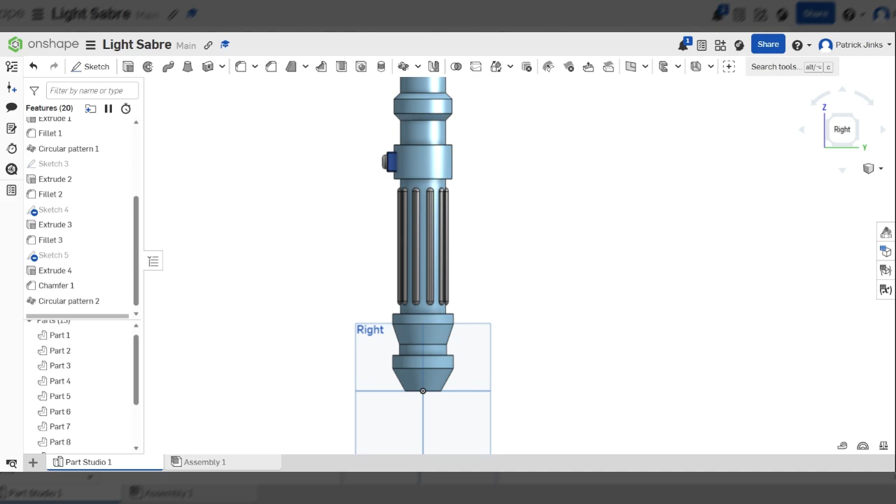Today we're going to be adding some, probably the final details onto our lightsaber. And then once we've finished this lightsaber, I'm going to go through another one just so you can see a range of different designs and features we can add, and how we might go about doing that.

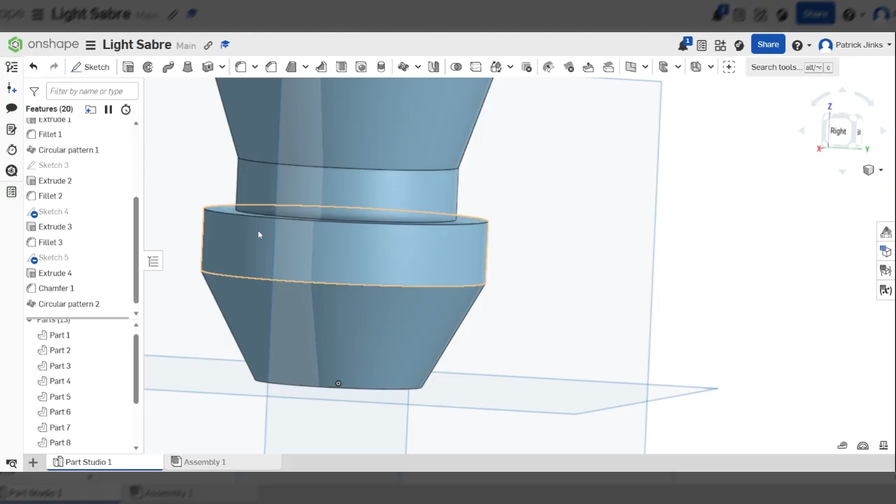The first thing I'm going to do is add a couple of features to the bottom here, to this plain cylindrical section. And the way I'm going to do that is using the circular pattern tool around here. I'm going to do something slightly different for this.

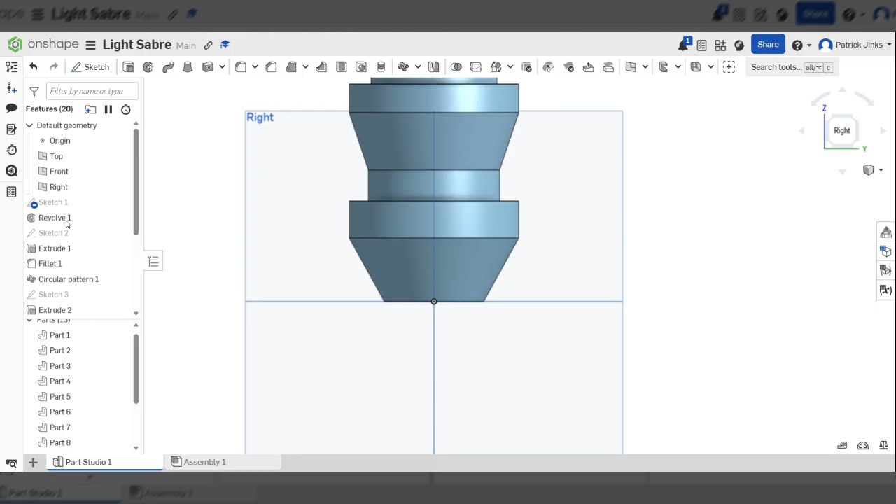The first thing I want to do is make a plane that is exactly, or near enough, halfway through this section here. Now, I'm not going to do this, but if you go back into your very original sketch by double clicking it, we only put 2 dimensions on, and that scaled up the whole thing for us, and it worked quite nicely.

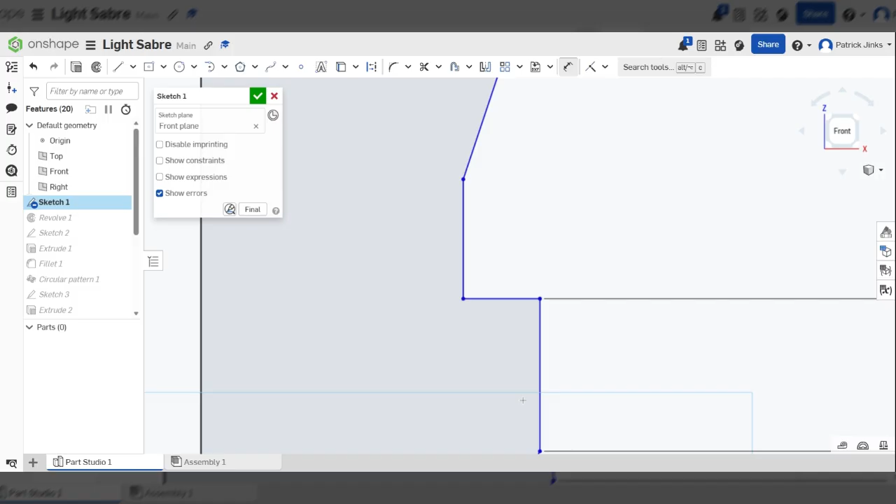What I might want to do is go into some of these dimensions I want to change, I want to specify, and just make sure they're a nice round number. So I might change that to 15, and it shouldn't do anything — it should just scooch that up a bit so that we've got a nice round number there, so I know where to position my plane.

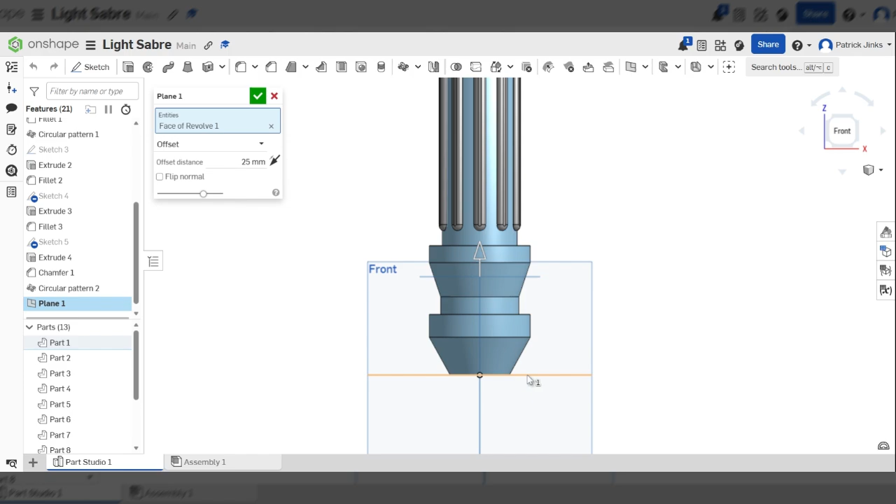So what I'm going to do is click on this flat surface here, or as near a flat surface as you can get, and once I've done that, click the plane button. That's going to put a new plane in for me to sketch on so that I can draw midway through the shape without starting at the top, the bottom, or an existing flat surface.

What I'm going to do is drag that to near enough halfway through my flat. I know that this was 15, so I want to change that to 7.5, and that's going to position this plane exactly halfway down this section that I'm working on.

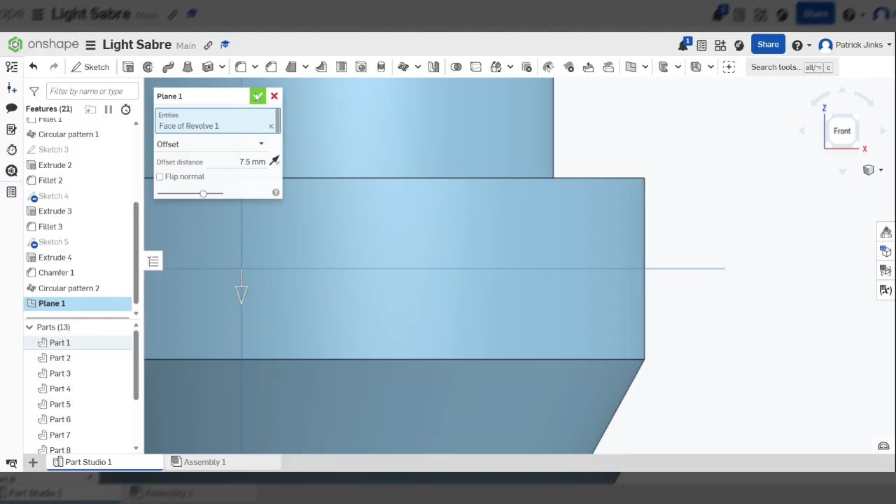What I'm going to do now is look from the bottom up, because I want to be looking up. I want to click on that plane I've just made, look at the base, press N, and that should snap me so I'm looking straight up at the lightsaber.

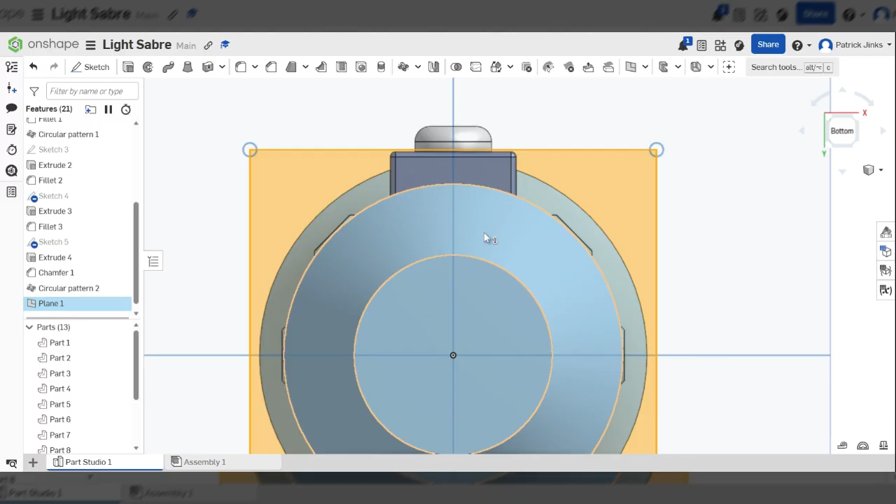I'm going to put a few triangles in here, and the easiest way to do that, I reckon, is — I can start down here, go up, it doesn't really matter how far I go up, come down, just as long as I'm in this blue section, just as long as I'm going beyond this border. That should be fine.

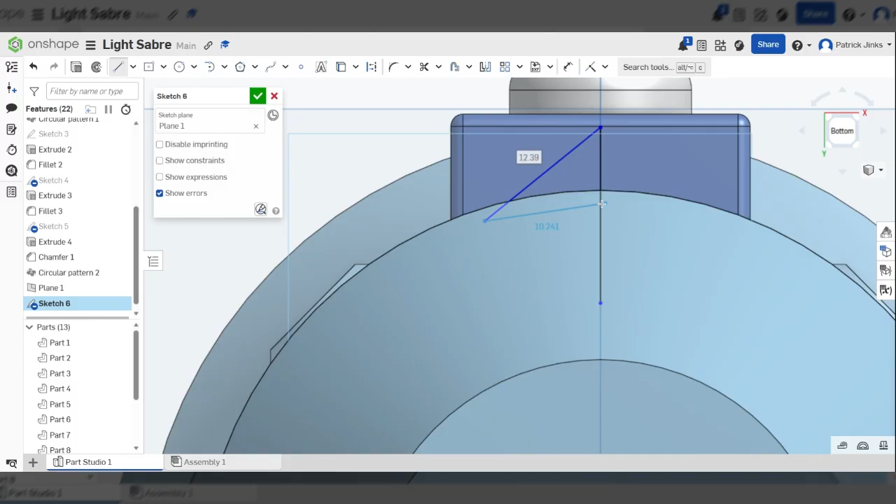Because all this part's going to be hidden — it's just going to be this bit that's sitting proud. I'm just going to trim that, and I'm going to mirror that. So click on the mirror tool, click on the mirror line, the thing I want to mirror it around, then select everything, and it pings it across.

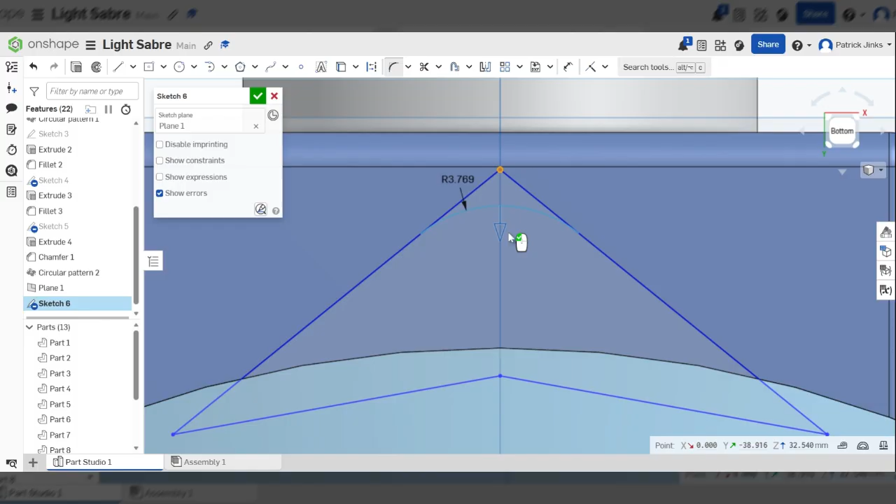I'll trim out that center line, and all I'm going to do now is put a sketch fillet on this part. I don't want it too sharp, I want it quite rounded, so I think that's going to be all right. If we rotate round and look at it, I've now got the shape that's sitting proud.

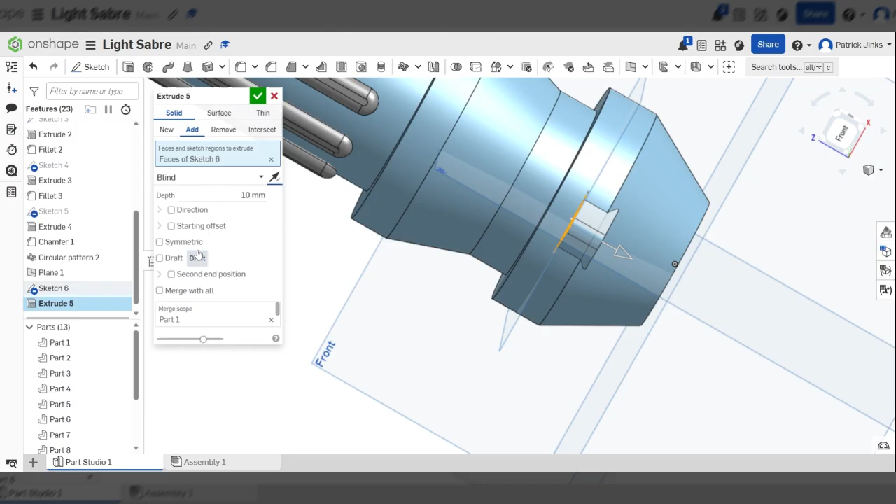I can then extrude it, and I'm going to extrude it symmetrically by 10. I'm going to see what that looks like, making sure you're clicking symmetry or symmetric. What that's going to do is put half above and half below that line.

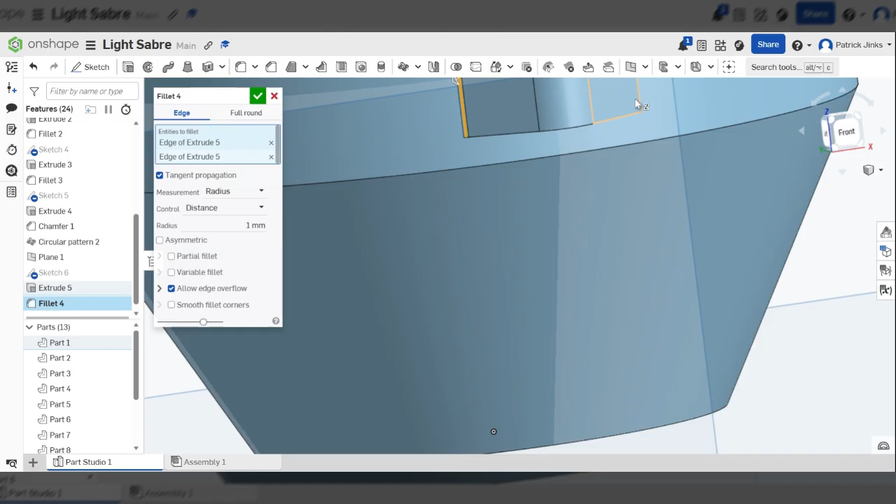I'm going to click the tick, and then I'm just going to put some fillets on the edge. You won't be able to see these too big, most likely — I'm going to make them 1 mil. That should round off those sharp edges nicely. Maybe I'll get away with 2 mil — let's have a look. No, 1.5 perhaps. There we go.

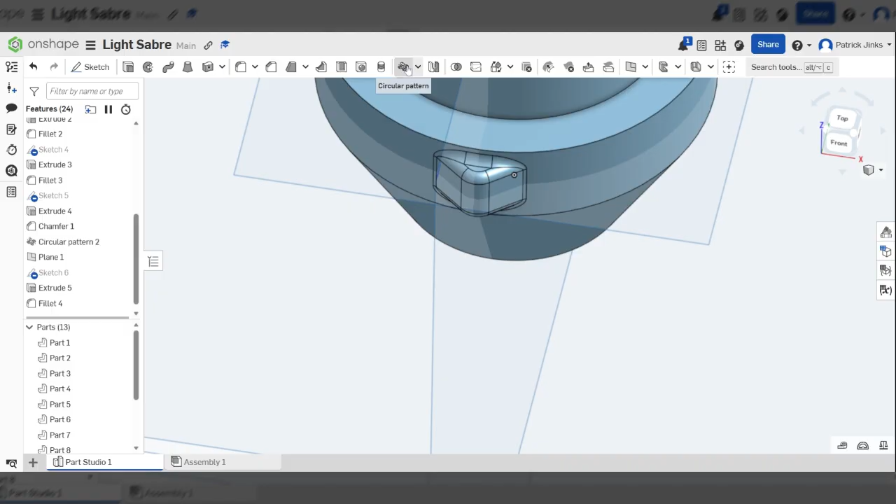So I've got this feature sticking out, and what I'm going to do now, since I've got this feature on the new plane, is circular pattern this. So I go to circular pattern, features to pattern, because I'm not adding a new part — it's going to be a new feature on the existing part — and that's going to be the fillet and the extrude.

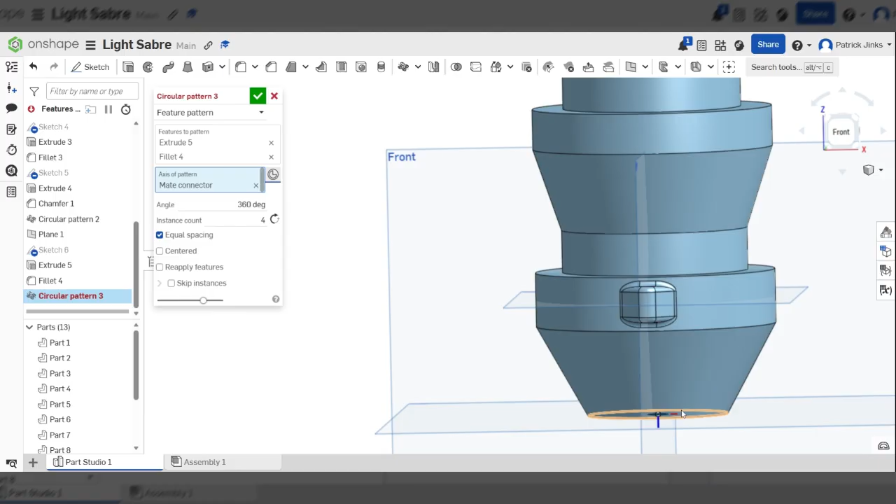The axis of the pattern — I'm going to click on my little Pac-Man symbol there, and set the origin, making sure it's following one of the circles I've got going round, as long as it follows the same center line. I've got 4 there; let's try what 6 looks like this time — I think we did 8 before. 6 looks fine, 6 looks all right. So now I've got that extra detailing on the inside.

On the outside of this bottom section, to just make it a bit more interesting, what I can do is in between the gaps, I'm going to put an extrude remove in.

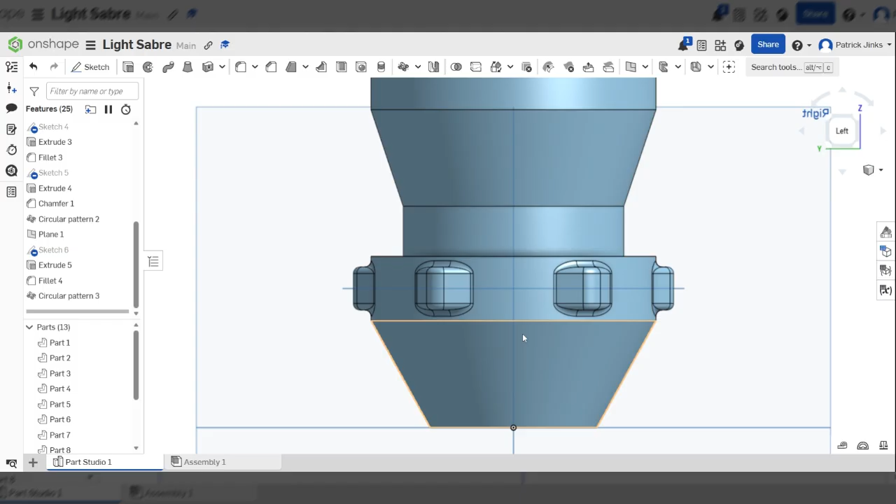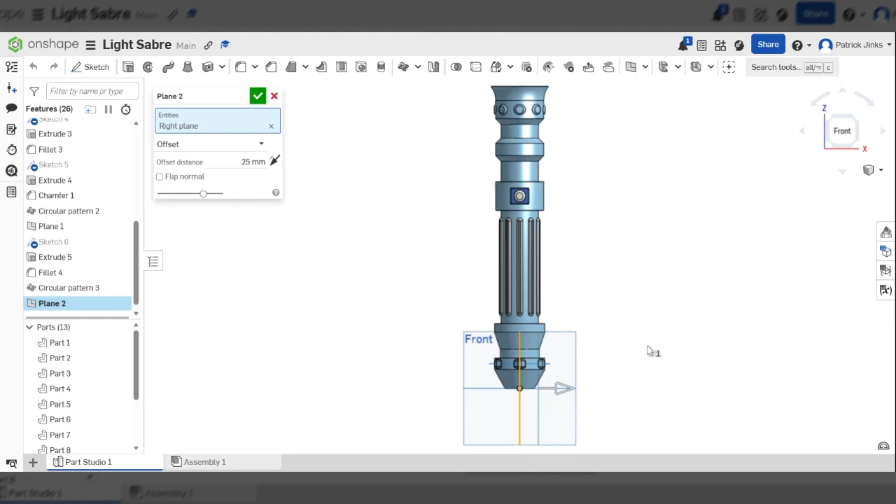So I'm going to sketch a circle. What I'm going to have to do is make a new plane for this since I'm doing a remove. I'm going to look at my front plane, or make a new plane that's sitting just off the edge of my design, so it's always outside my design, and click the tick.

So this is going to be plane 2. I'm going to click on plane 2, press N, so I'm looking straight at my design. I'm going to sketch a circle. You can sketch whatever you like - you might want to sketch something a little bit more interesting.

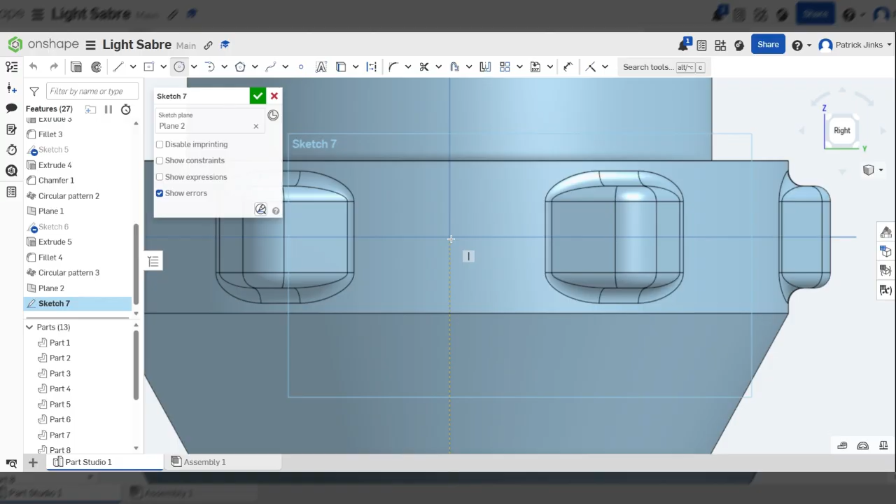On this center line somewhere, I'm going to do that sketch, making sure it's in the middle - so 7.5 mil from either the top or bottom. I'm going to just make that 8, so it's a nice round number.

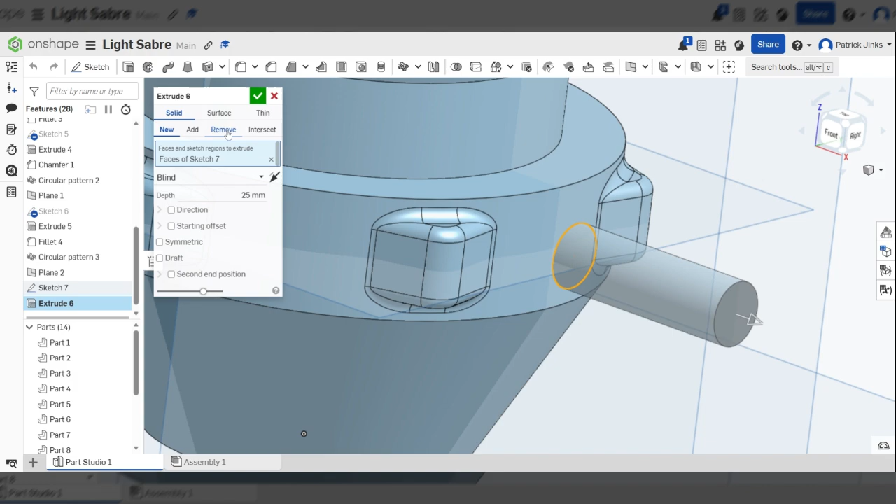And I'm going to extrude it just a tiny bit - extrude remove it. So let's try 5 mil, see what that looks like. Yeah, I think that looks fine.

Again, maybe put a 1 mil fillet. Am I going to get away with that? Probably not - 0.5, yeah.

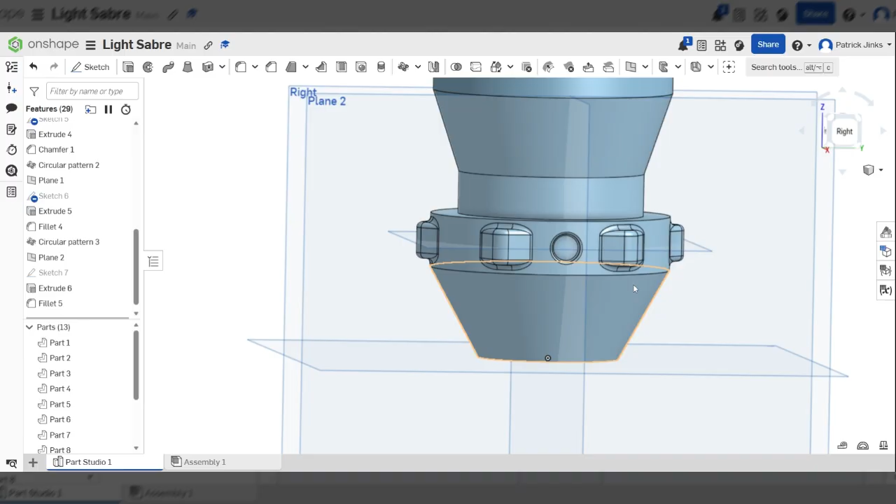And again, I'm going to circular pattern that - circular pattern, feature pattern. Just select my fillet and my extrude axis, click any of the circles that go around my shape. I'm going to make that 6, and you should see that circle appear in between each of the rectangles that we drew. So I've got quite a complex base now - I've got a lot going on down there.

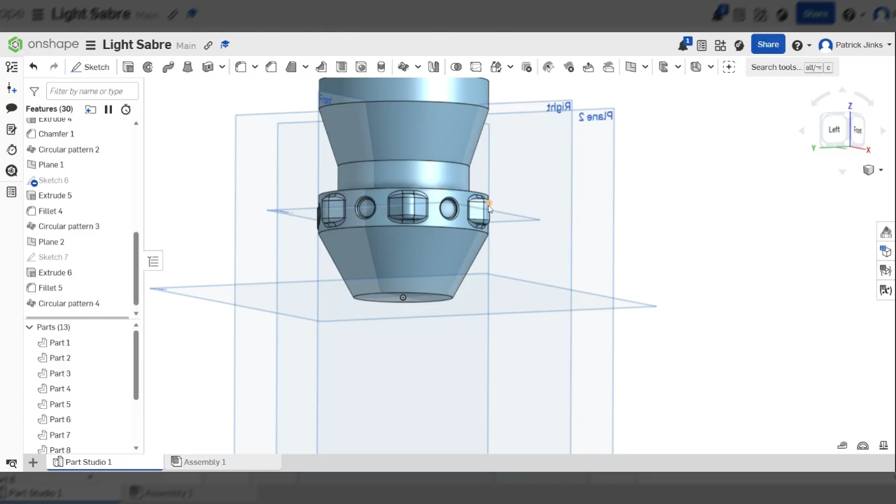And now we're going to do a couple of removes on this section as well, so I'm going to hopefully make it look a bit more interesting now.

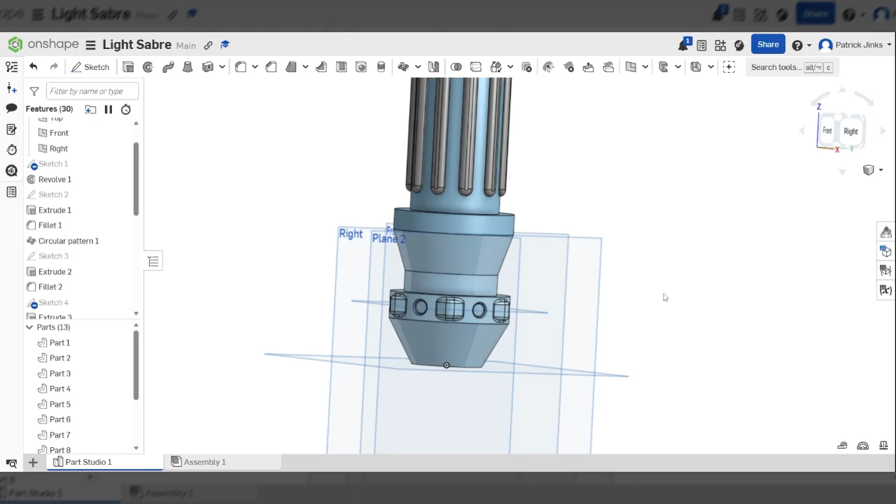I'm going to click on my front view - in fact, no, I'm going to click on my plane 2 and look at it. And this time I'm going to draw a center rectangle inside and going all the way across this section here.

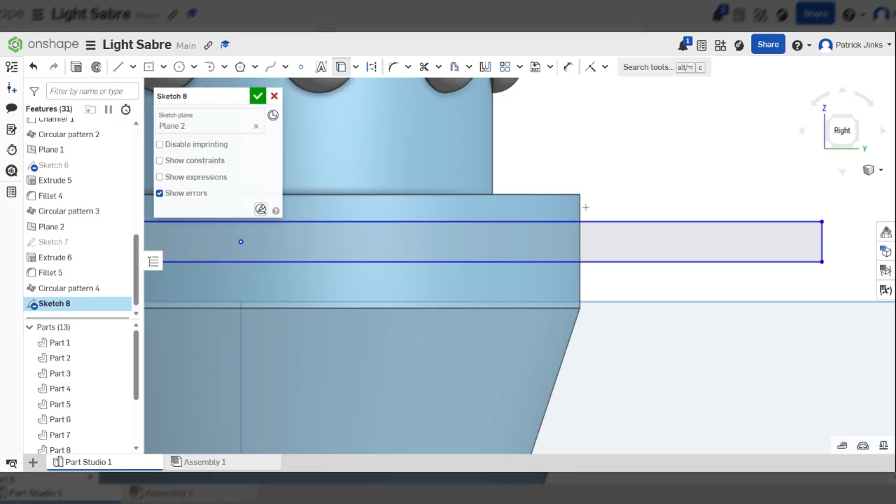Okay, and now I've not dimensioned this, so I don't know exactly how big it is. What I can do, however, is project this line here - that's going to make it part of my active sketch, and I can see how big this is. To actually edit it, I'd need to go back into my original sketch, but I can see it's about 115.

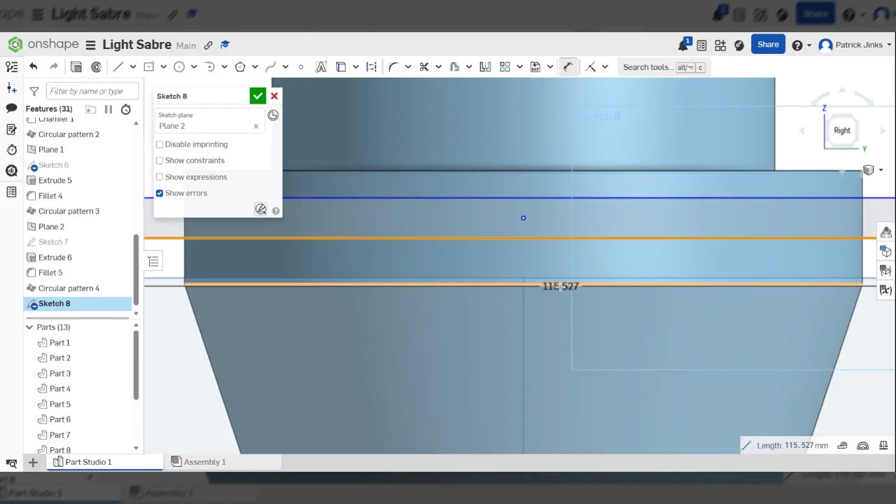That means that we want this to be probably about 5 mil. To make sure it's in the middle, I'm going to make sure the bottom of this line is 4 mil away from the bottom of the rectangle, and the top of the rectangle is 4 mil away from the top of that line. That should make this about 3 or 4 mil - yeah, 3.1 mil, that's fine.

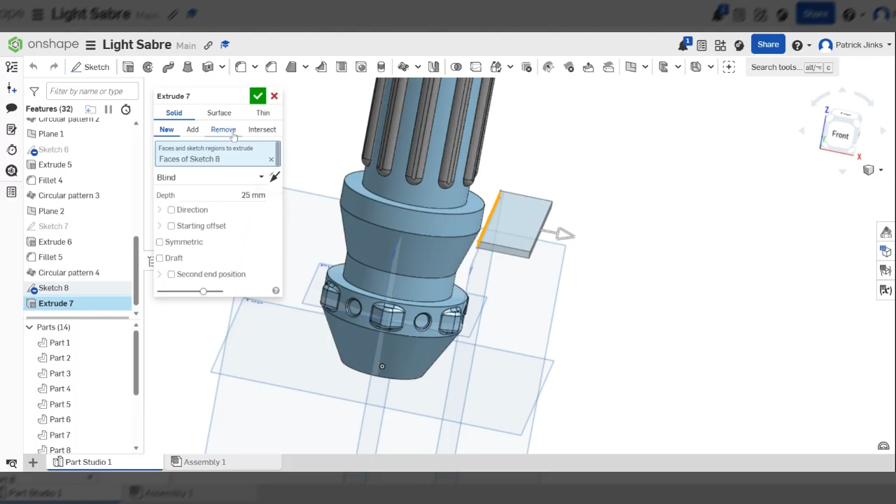And what I'm going to do there is extrude it, click remove. I'm going to look at my front view so I can see how far I'm going in here. And I think that's going to be all right - I don't want it to go in too far, but I do want a little slot just so we're adding something a little bit different.

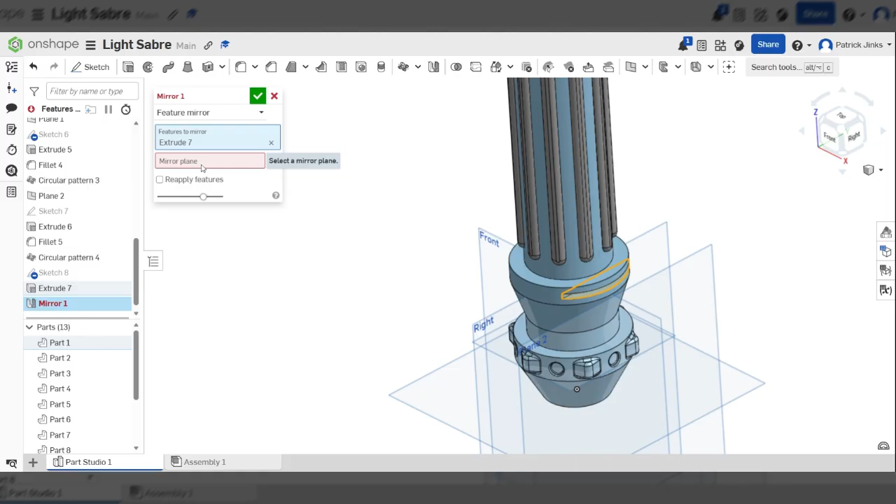And then I'm going to mirror this feature, so I'm going to click my mirror tool. I'm going to click on the right entities to mirror - it's going to be a feature, not a part. I'm going to mirror that extrude that I've just done in this panel. Mirror plane - because it is a plane, I want to do it around the right plane, so I can just click on the right plane.

Reapply features, and hopefully - yeah, there we go. We've got that slot coming in there.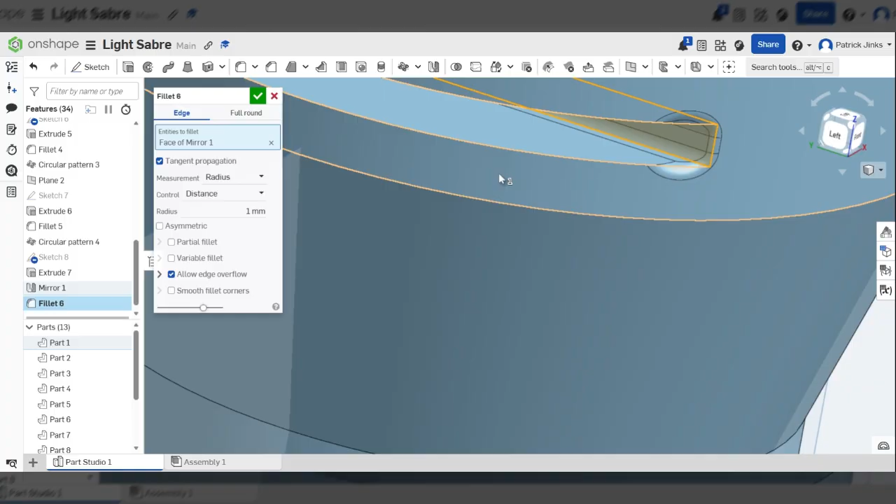Okay, and again, I'm going to see what fillets I can get away with - I should get away with 1 mil, I reckon, on all these surfaces. I could have done this before I mirrored it, but there's no harm in doing it after instead.

There we go, so now I've got that slot there, which I don't know what the function for these things is going to be. The more functions and the more complex you make it, the more impressive it's going to look.

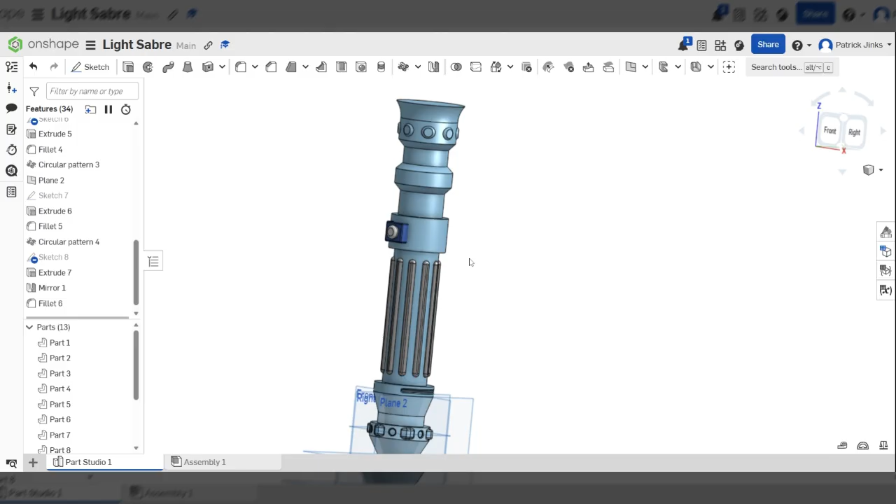Okay, so there's one more thing I'm going to do. I'm going to click on a flat plane, the one with the button on. I'm going to right click on it and say make section view. This is going to enable me to hide everything above it and just look straight down at it.

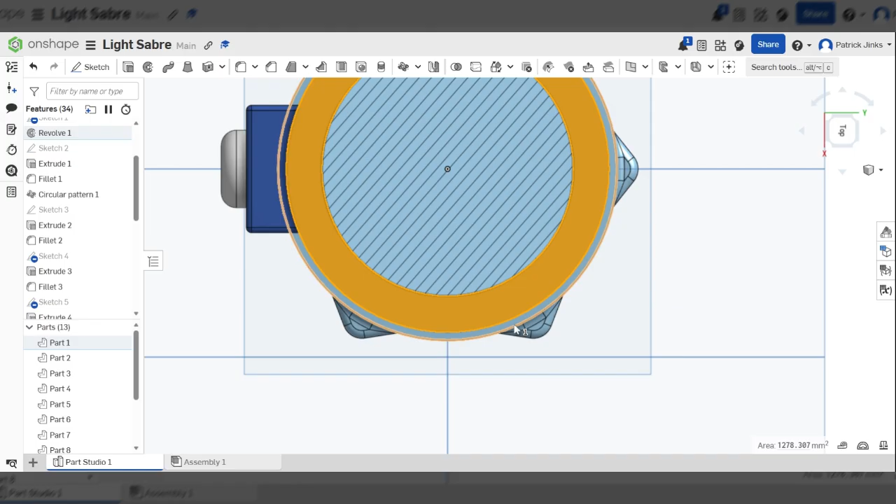Now I'm going to sketch a shape that I'll circular pattern around 1, 2, 3 of these sides. This isn't going to be a flat shape that comes out like our button, right from the middle. It's actually going to follow the curvature of the shape we've got.

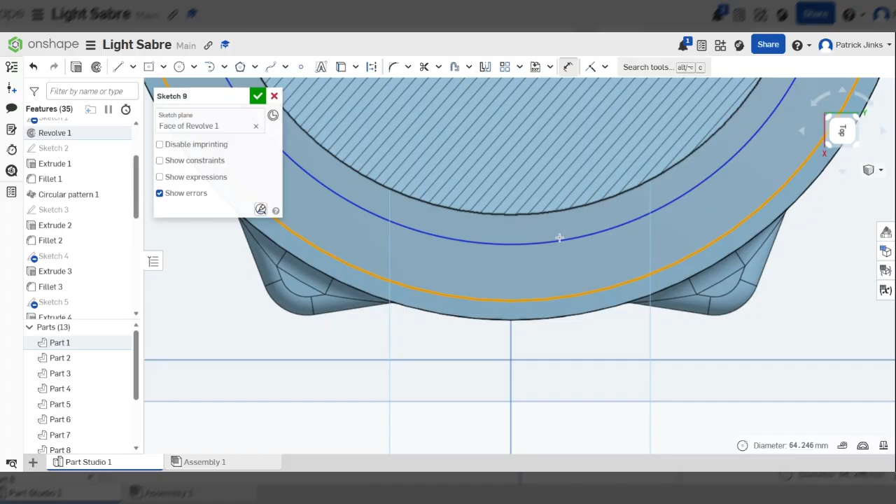So I'm working on this orange section, this is the surface I'm working on. I'm going to do a sketch from the middle, sitting just between this line and this line, so about there. Let's get a nice round number to space that out with - I'll do 5mm. There we go. Now I'll draw a line straight down from the origin.

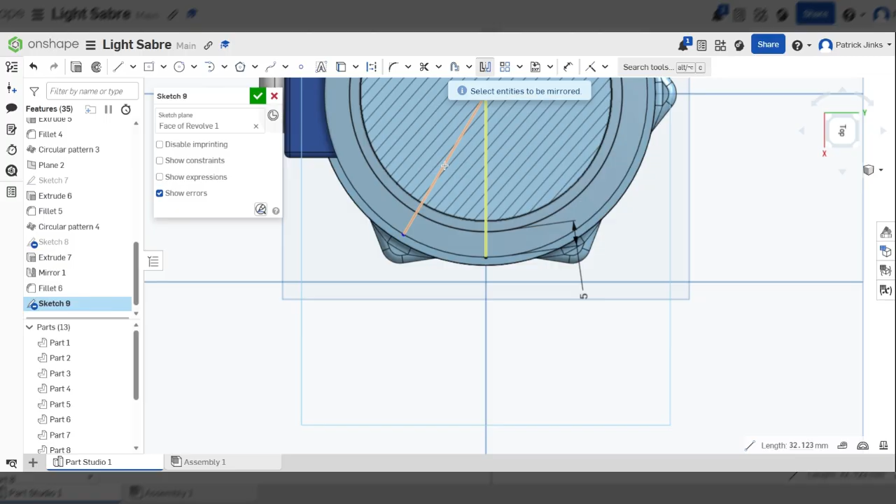I'm going to draw a second line that comes out somewhere over here, making sure the angle's not too steep. Then I'll do a mirror, using this as my mirror line, and click on the one line I've already drawn. So I've got this wedge shape, this cheese shape.

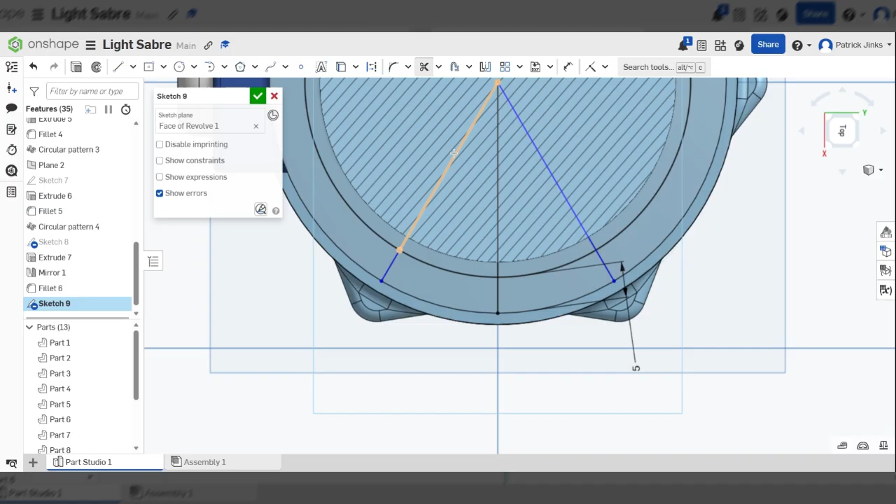Now I'm going to get rid of everything outside this section - this curved rectangle quadrant and this quadrant. So I'll click my trim tool and get rid of 1, 2, 3 lines over here, this line over here, and this line I just drew over here.

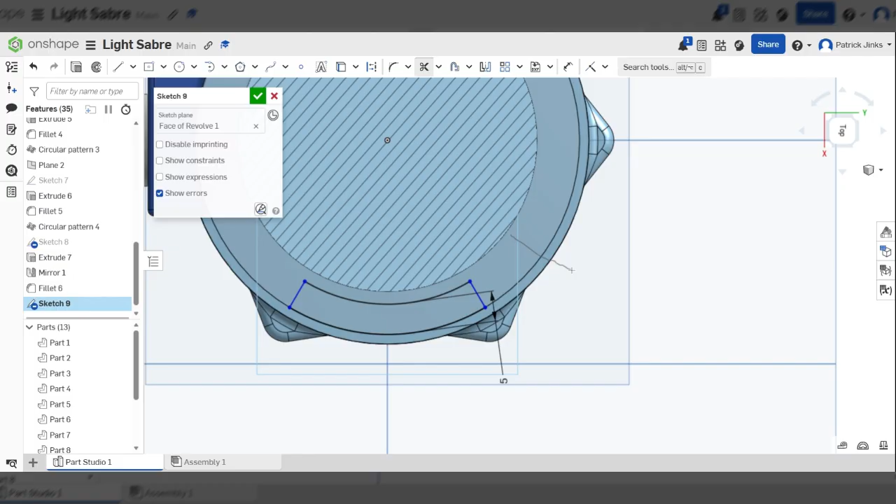What I also need, sorry I forgot, is to draw a second line, just a second arc, to cover the outer section of this polygon I'm making. So it's a closed shape - once I've got this closed shape, 2 lines and 2 concentric arcs, I'm going to do an extrude, remove.

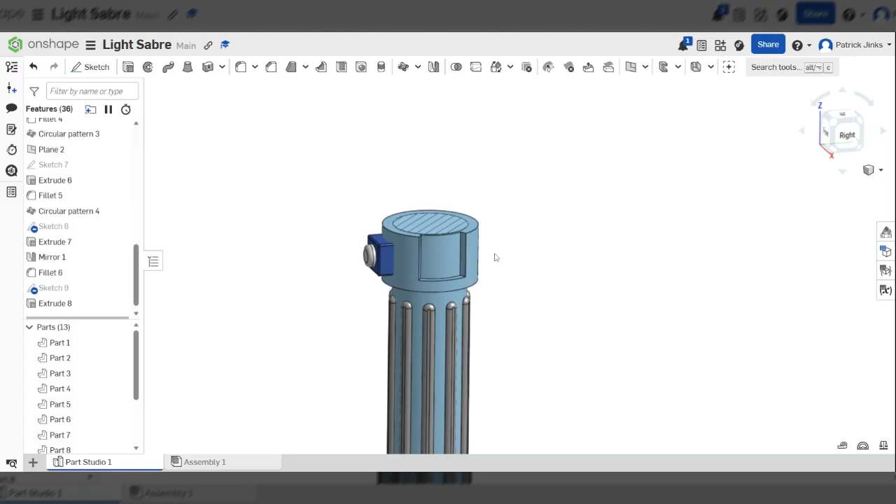Let's go 30, that's a nice round number. Click the tick. Again, put fillets on my edges - no harm in that.

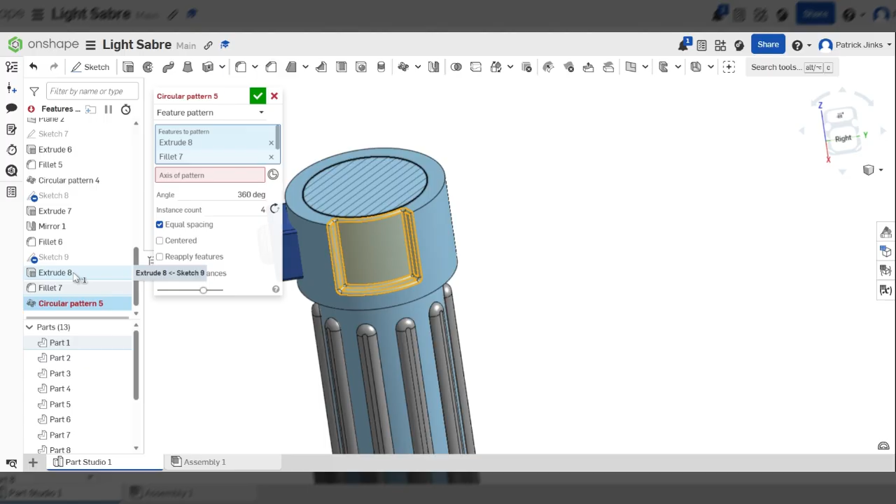And then I can do a circular pattern tool. I'm going to go back to feature again - feature to pattern is going to be the fillet and the extrude. Axis is going to be any one of my circles that I've got. Now it's going to default to 4. I don't want 4, I actually want 3 - but I don't want it to occur on this instance, on the third instance.

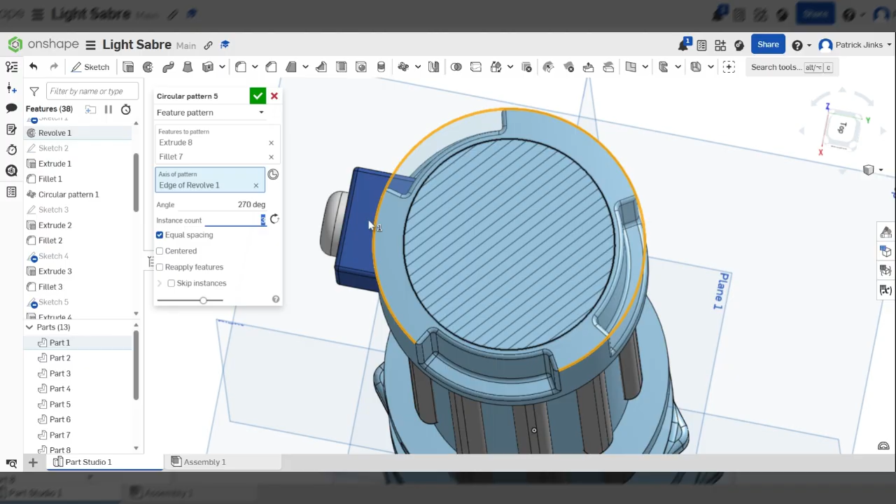So I'm going to set that to 3. It's going to default, by default, to evenly space it. But what I want is, in my angle, because I only want it to go 3/4 of the way around the circle, I'm going to change that to 270. It's not quite done what I want there - 180, there we go. I can just change the direction so that I get that appearing on 3 faces other than 1. So it's only continued that pattern 180 degrees rather than 360 around the circle.

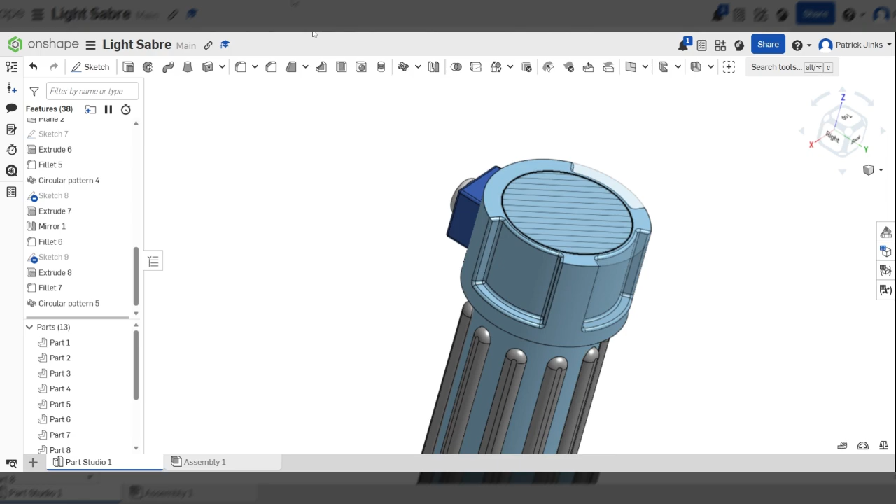If I click the tick there, and then right click on this surface again, the shaded surface, and click turn off section view, I get everything back plus my pattern that I've done halfway down my handle.